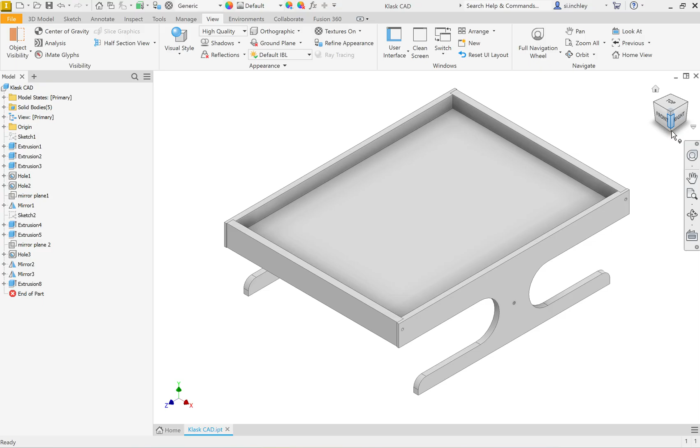In this video, I'm going to show you how to create the cross brace that goes underneath the board, and it's going to go across here and be screwed in with these parts here. So the first thing for us to do is we want to create a part that's going to go on there. So I'm gonna shift it around to this view.

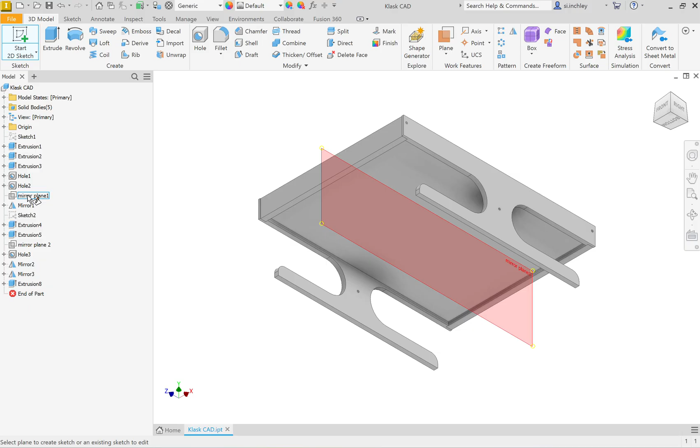I'm going to make sure I'm in 3D model and start a 2D sketch. And I actually want to put it on the midplane that we generated earlier. So if you look, and you did actually rename your midplanes, then you'll see that it's the second one along here. It's the second one I did. And I can just click on that as the plane I'm going to work with. All right, and now I can see that I'm definitely halfway through there.

I'm going to right click and I'm going to slice graphics. That now lets me see through this bit of wood and see where the bottom of our base is. I'm going to come up and go to project geometry with that clicked on there, or you can select it like that. I can now come up and click on that point there and then also on that point there. Now we use those as location points.

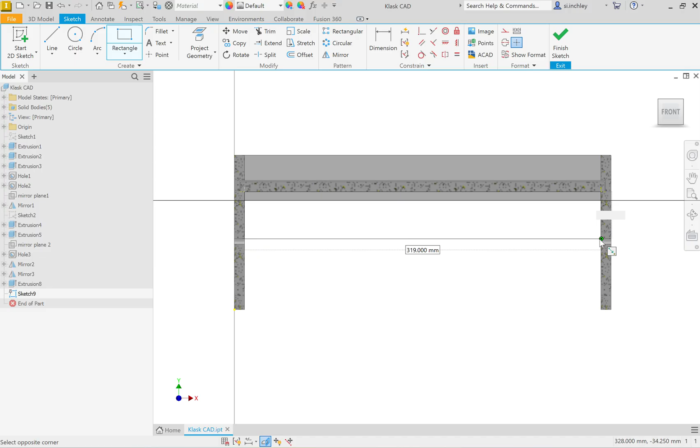Then click on rectangle. Now you can lock onto that point you've just generated and come down, bring it across till it locks onto the other side point. And then I'm going to press tab. I can see that's 319. So I'm going to tab to the other dimension and change that to 60 millimeters and press enter. I can now finish my sketch, and you can see that that sketch goes right the way halfway through this hole if everything is lined up.

So now I'm going to go to extrude, and on extrude you need to change it to 9.2. It will be 10, and you want to change that to 9.2, which is the exact dimension of the bits of plywood that we have. So 9.2 to start with, and yours will be on join material. You need to change that over to new solid because it's a completely new material. You also want to change the direction to this one, which is symmetric, which means it goes both ways around that center point.

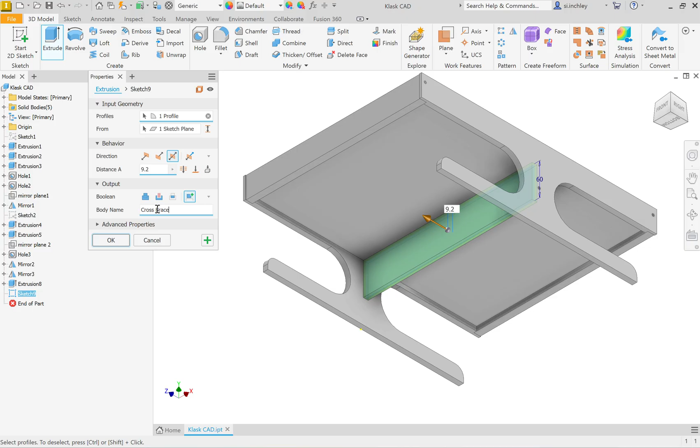Okay, with that in place, you might also choose to rename the body. So I'm going to call mine cross brace like that. And there we go. We've now created it with those different things in measure, going two different ways, 9.2 and new solid, and changing the name to cross brace. Then I can click OK.

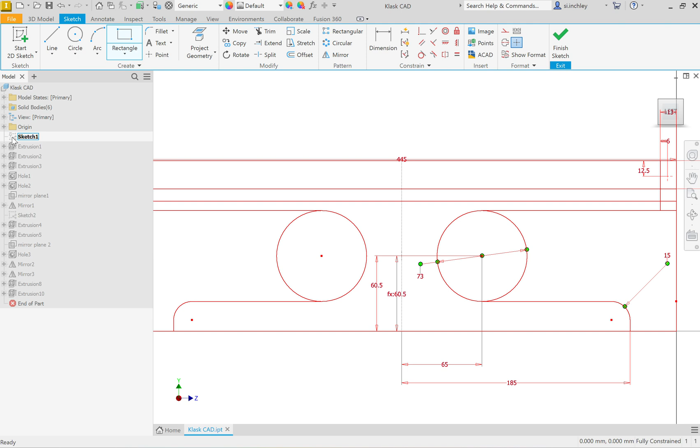Now I want a pilot hole to go through that, because if I come around this way, you're going to drill a clearance hole through here, and then you're going to drill into it. So I want a pilot hole that's going to go into there. I'm going to use this sketch one that we used before. So I'm going to right click on that sketch one and make it visible. Now I don't think we put a point in it, so I'm going to double click on that sketch one, and I'm not sure we actually put a point in the middle here where we're going to work with.

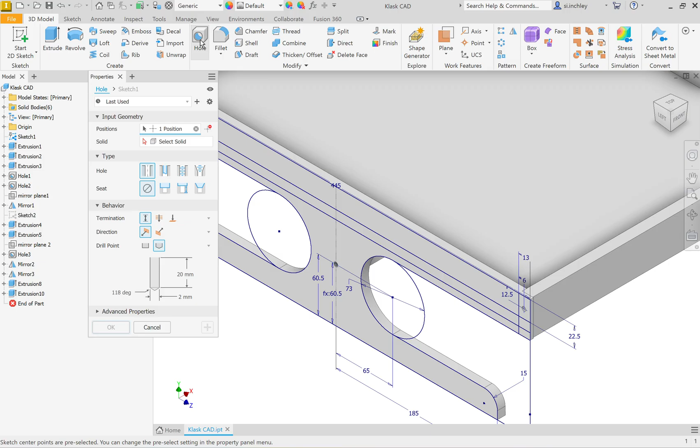So I'm going to put a point now, so click on the point tool, that was just here, and then come over, and just when it lines up with these two holes here, we're just going to click once there. Now I've got a point there, I can finish my sketch, and now when I go to the hole tool here, I can select that point if it's not selected already. All right, there we go. So I've now selected that point.

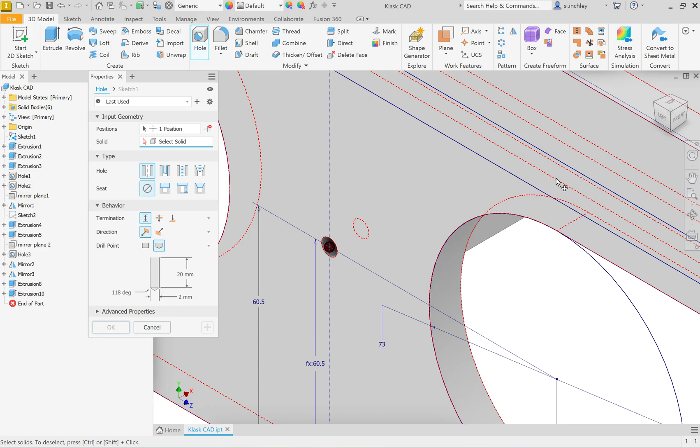The next thing for us to do is to click on this solid area here and select the solid we want to use. Now click this one, it's the cross brace, and I can just see it underneath there. If you have to rotate around to click on it, then do that. All right. Once you've got that in place, you can see the arrows going out like this. We're going to change directions from that direction to this direction, so it's going in.

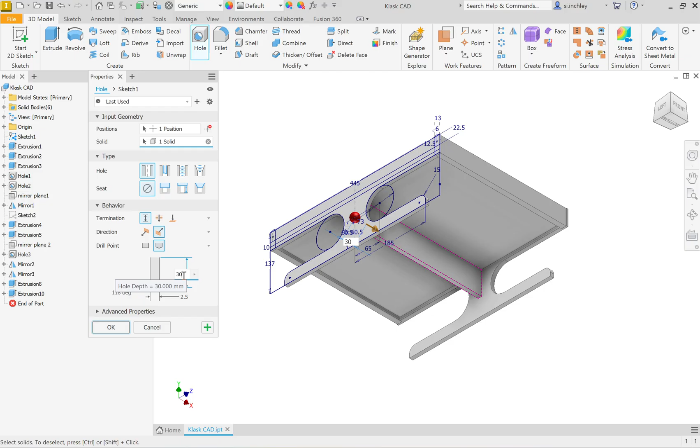And then we want to change it to a 2.5 millimeter hole. And then if you haven't selected this distance button, you won't see the distance that it wants to go down. So you need to change it to this distance button here, and now this distance, I would set that to maybe 30 millimeters or at least 20. Yeah, I'd set it to 30. Depends which screws we use, but 30 is not going to be a problem. So set it to 30.

And you should be able to see that now. If we have a look, you can see how far that's going all the way through. Okay, and then you can click OK. Now that should have generated a hole there. The problem is you can't see it whenever you're looking around.

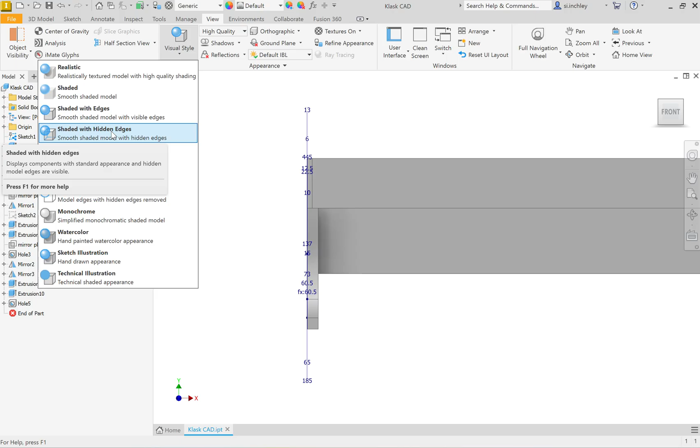So click on the front view like this, zoom in, and then I would personally, just to double check, go to view, go to visual style, and change it from shaded with edges to shaded with hidden edges. And there you go. Now you can see there's a hole running through that, and then you can change it back to shaded with edges because you know that's in there now. Now that's the cross brace generated there, and probably enough for this video.